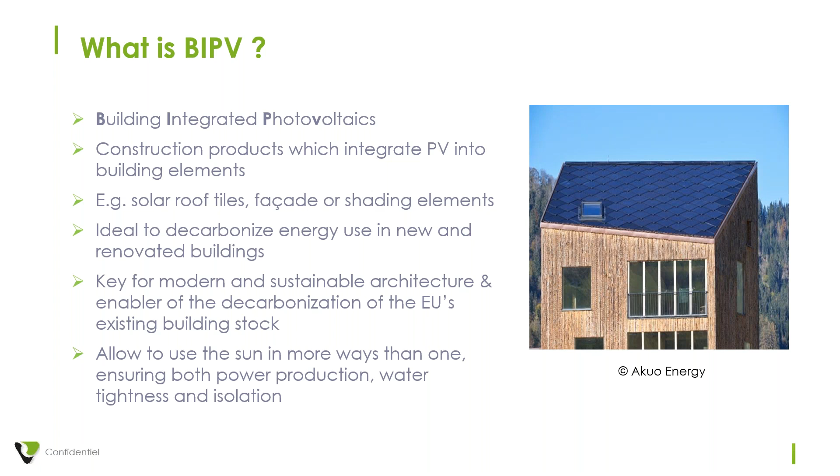More and more we see that architects are keen on getting this kind of elements into their new construction, but it's also very useful for renovation. What is interesting is that it has several added values. So it brings power production, but it also brings water tightness and insulation. So I'll get to my next slide, or you get to my next slide, please. These are a few pictures of what has been done over the world by different stakeholders, so that you can see on the facade, but also on the roof. Next slide, please.

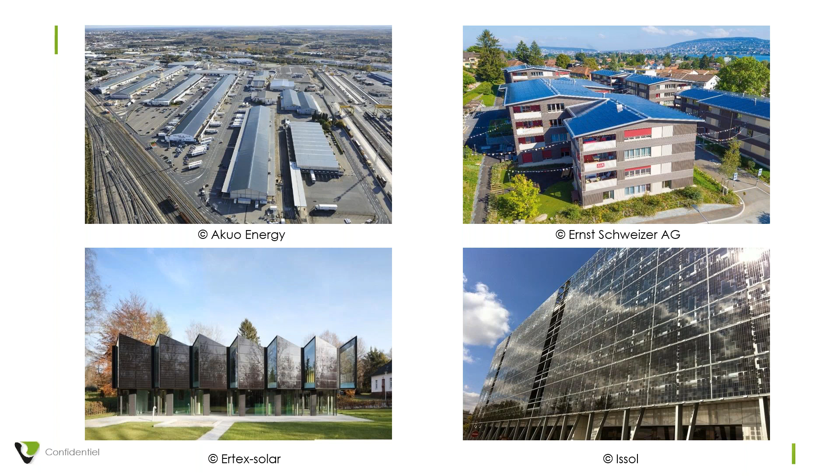I would like now to go through with you the manifesto that we released in March 2020. And this was strongly diffused in the EU areas, so namely the European Commission, the European Parliament, but also sectoral associations such as ours. And so this manifesto is a two-pager, and possibly Miguel could share the link with you in the chat box. So the objective was to raise the attention of the policymakers regarding 5 actions that should be undertaken at EU level.

First, we wanted to stress the need to have a market pull, and therefore every legislative text or legislative initiative should foster the use of BIPV, be it in the climate law or in the construction product regulation, or even in the renovation wave that is coming. So it's important to have really this pull.

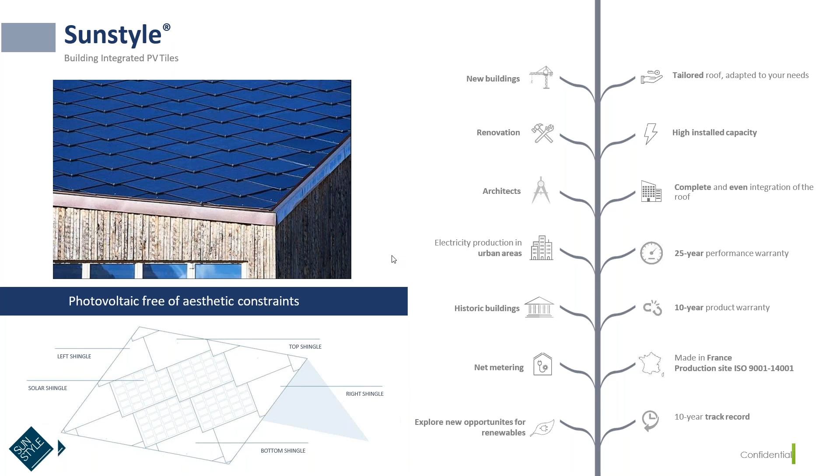But then we have been working a lot on the product so as to increase its resistance, its resilience also, and then to work on different colors. Next slide, please. So here you can see the 3 colors that are easily doable. If you are in Florence, for instance, you can go for terracotta. If you are in Paris, you can go to gray. But then if you want pink or blue one, it's also feasible. But the mass production is available in these 3 colors. Next slide, please.

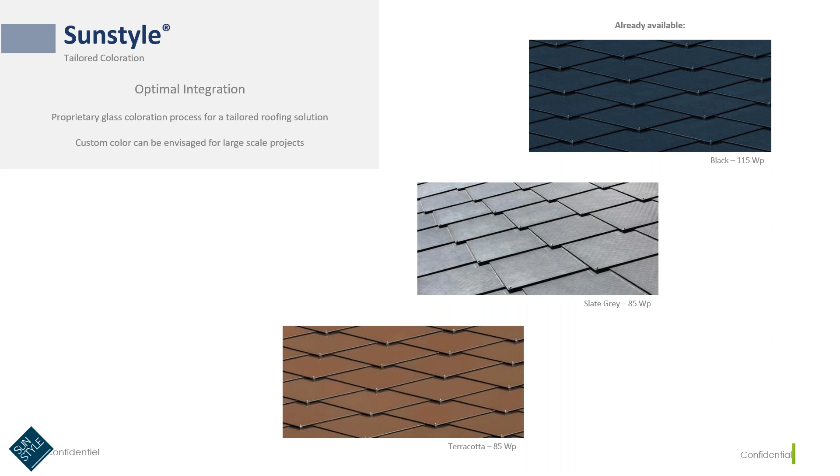Our market target is self-consumption, and per this slide, I wanted to give you an example of where it becomes profitable. So if you take a rooftop of 55 square meters and you install a Sunstyle product of 9 kilowatt peak, then it takes you 7 years to come to the point whereby you start earning money. So it's not so long actually, even for individuals and especially for large industry or companies that would use such a product. Next slide, please.

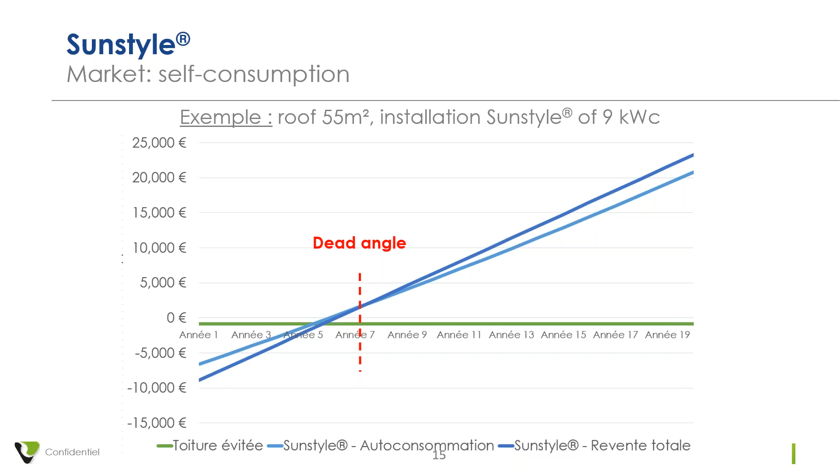These are the characteristics of the product. So this slide is addressed to the ones that really know BIPV. So the total weight is around 20 kilos. We have 10 years mechanical warranty and 25 years performance warranty up to 80%. I give you the figures about hail resistance, wind resistance, fire resistance. This is for the people who really like it and want to know more. It is 87 centimeters by 87 centimeters. So it's easily installable because it's square. Next slide, please.

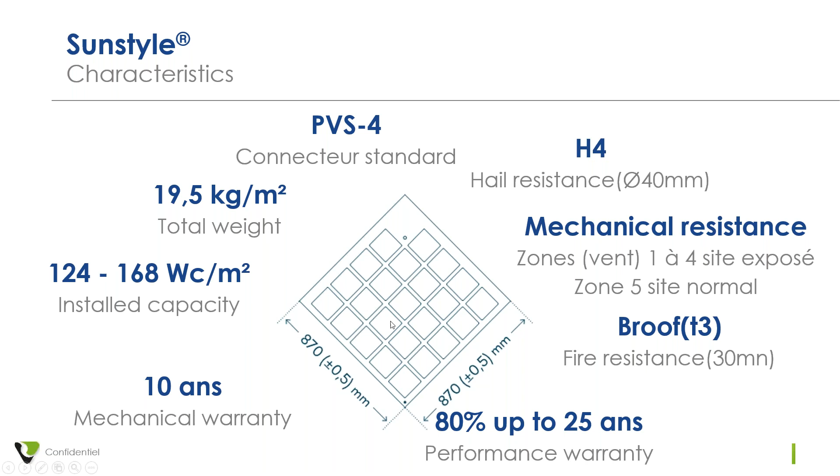As I told you, we started 10 years ago, but since then we have improved our product and we have been through many certification processes. So I know that some certification bodies are in the webinar now, so I'm speaking to your hearts. So we've been through the French certification of the system by the CTMNC, and then you can see the number, but pictures to illustrate what it is. Next slide, please.

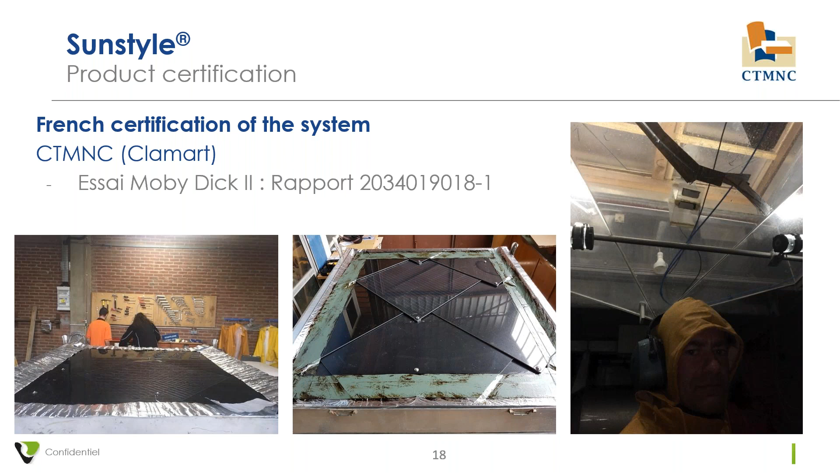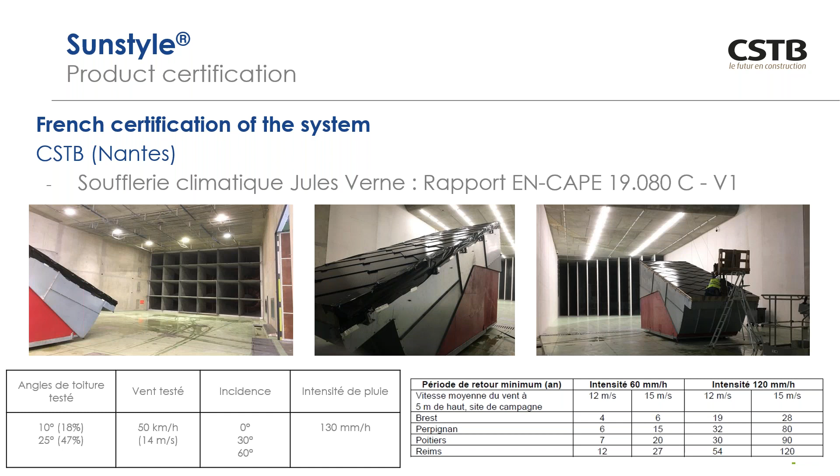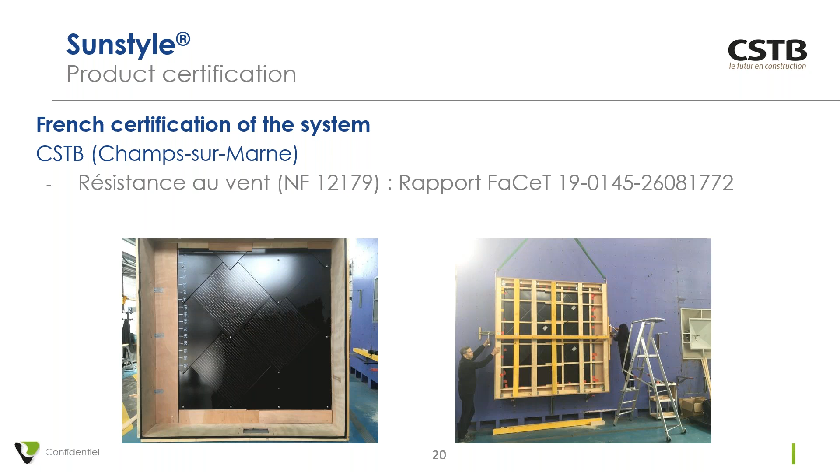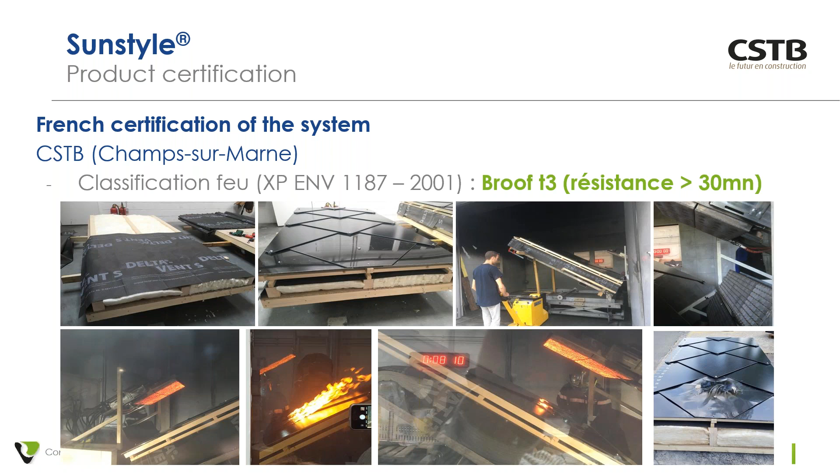This was the another CSTB certificate to the fire. So basically, they've been burning our tiles. Very interesting process. So here you can see our tiles burning, or not burning.

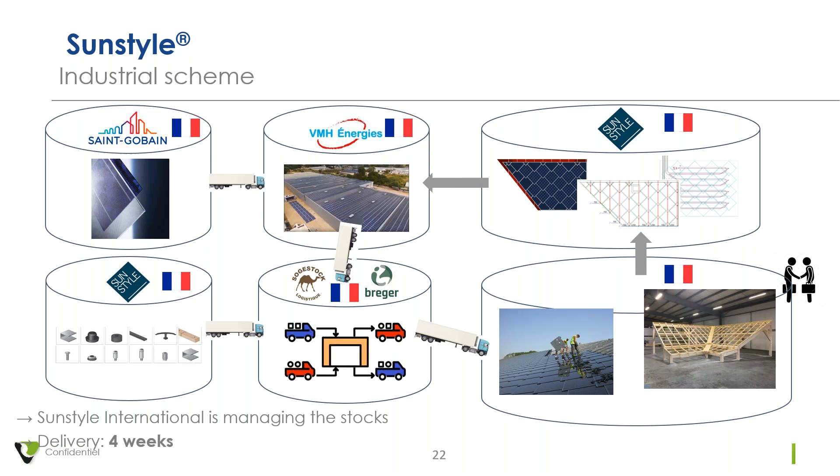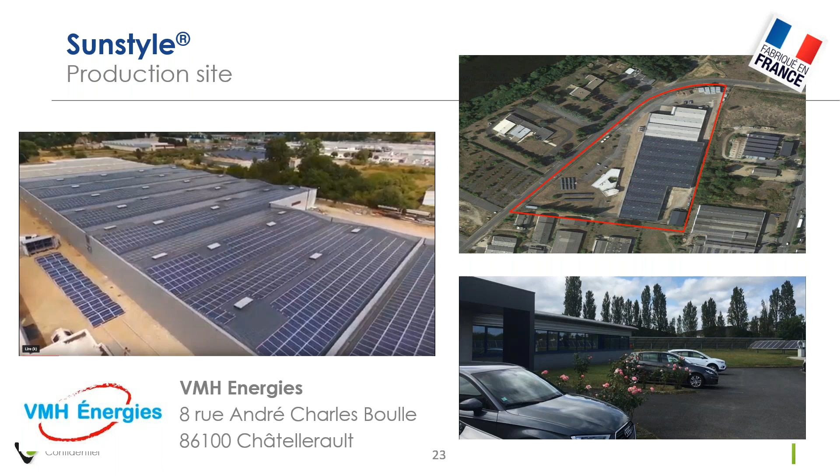This is a picture of the factory in Châtellerault. So you can see it's a very big production site. Currently, our capacity is 50 megawatts, and we are looking forward to extend this considerably over the next years.

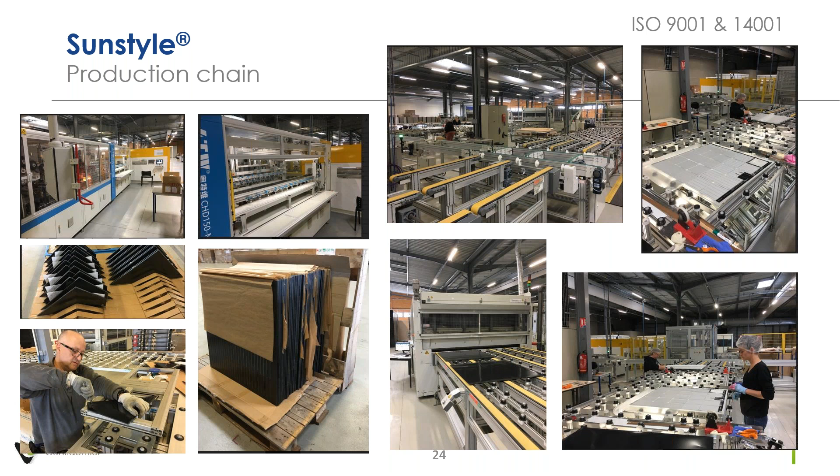Here you can see what the production chain looked like. This picture was taken before the COVID crisis, therefore they don't have masks, but the new ones will be with masks, of course.

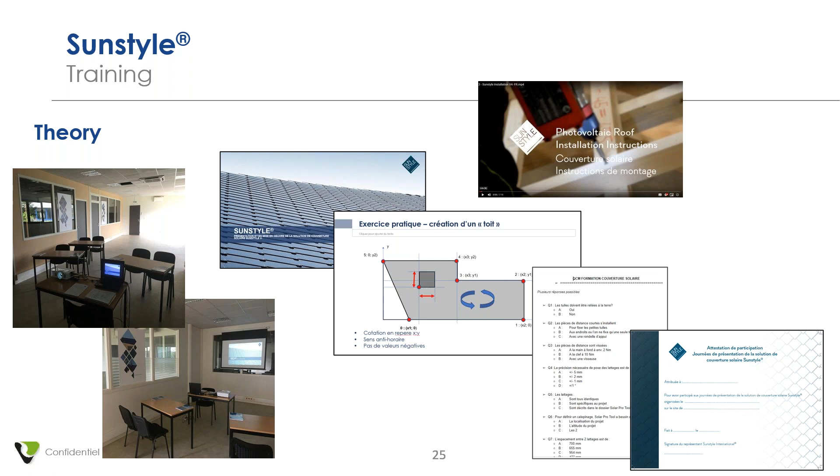And then we decided to invest to create a training that is composed of 2 parts, a theoretical part and also a practical part. It takes 2 days. It's a 2-day training, and we have groups of 8 to 10 people, and we organize them once a month. We started by targeting French installers, so it's currently in French, but then we will move on to EU-wide installers, so we will move to English as of 2021.

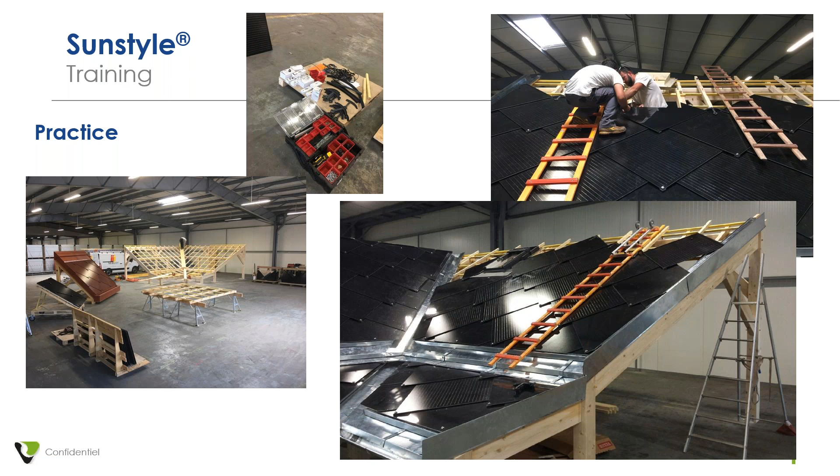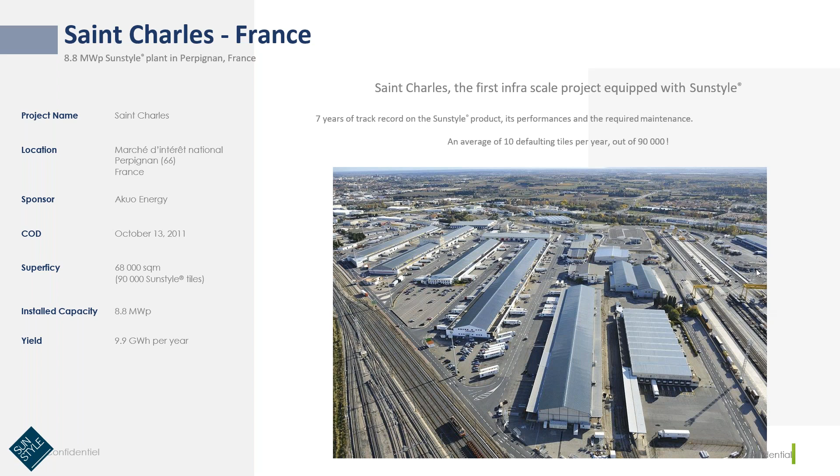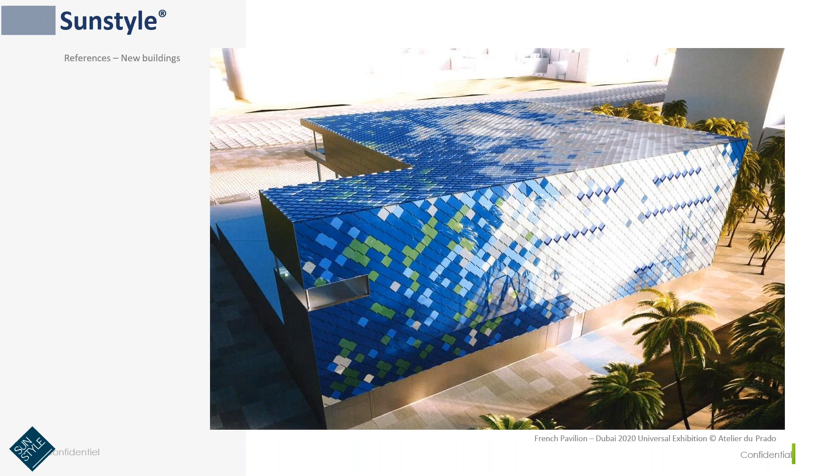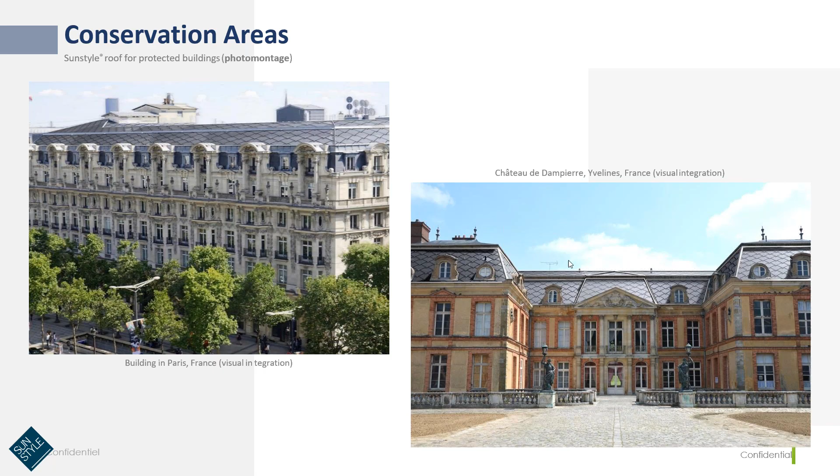Okay, thank you so much. Good morning, everybody. I would like to go quickly through our thinking on how to scale up these BIPV products. So can somebody start the presentation, or can I do it myself? Okay, next slide, please.

So we belong to the TNO research organization in the Netherlands. We have activities on buildings. We have also activities on circularity, and we have also activities on sustainable energy sources like PV. We have 2 groups. One is in the north of the country, located in Petten. And then we have a new one, it's like 10 years there, in the Eindhoven region. And that's more a collaboration between TNO and other institutes as well as universities.

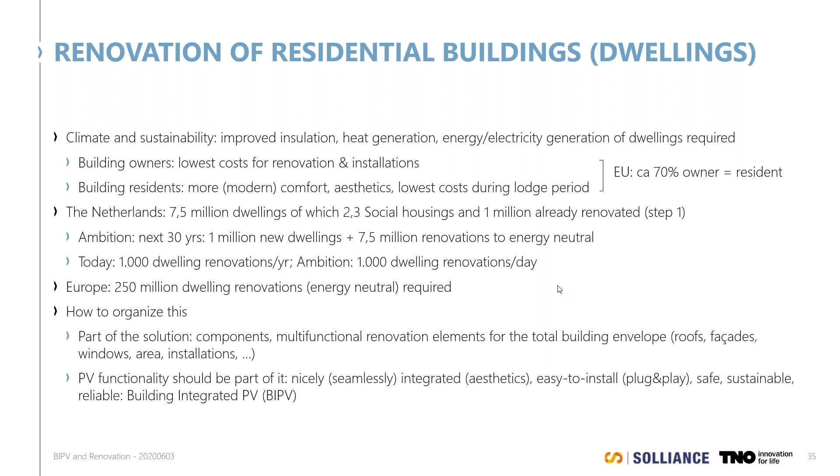Now I'll give a few examples of what happened in the Netherlands over the last 10 years in relation to renovation. Already 8 years ago, 152 houses were renovated from energy class F to A+. It was a complete renovation with a new building envelope, including BIPV in this case.

The inhabitants had to leave their house for 1 week, but only 1 week. In the end, they were all very happy with the result, but the expenses at that time were quite high. This was related to the higher cost of PV at that time, but also to the approach of this project, since it was a one-time project, and a lot needs to be optimized, including around the building organization.

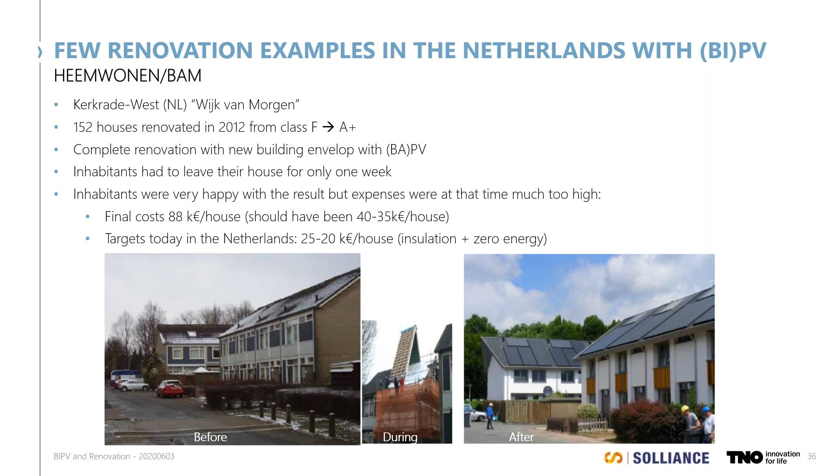So you see some price targets. For renovation, the targets in the Netherlands today are like 25,000 euros per dwelling to go to zero energy.

Here's another example: the Panzer concept. They can do it in 2 days and the inhabitants can just stay there, which is an improvement compared to the previous example. In this case, not only was the roof changed, but also the facades, and the indoor setting was also updated into a more 21st century setting.

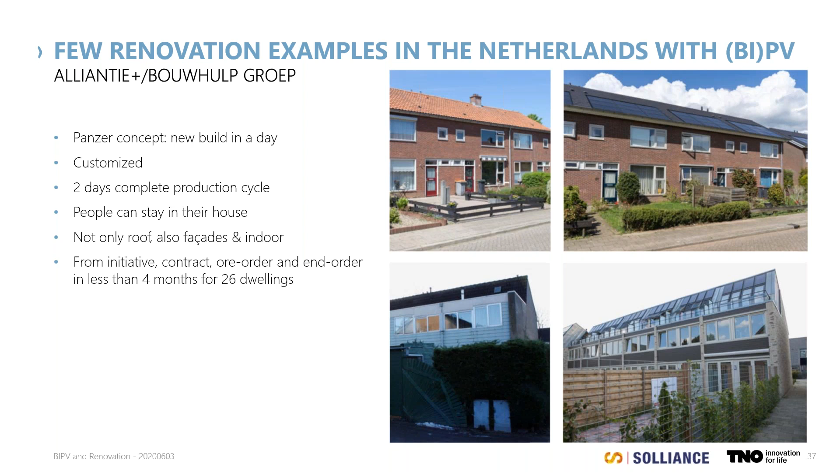Still another example, from the company Rebor BV. They have a patented approach to a fully integrated solar panel roof, and you can see two nice results of how it could look like. It's a full roof that is replaced immediately.

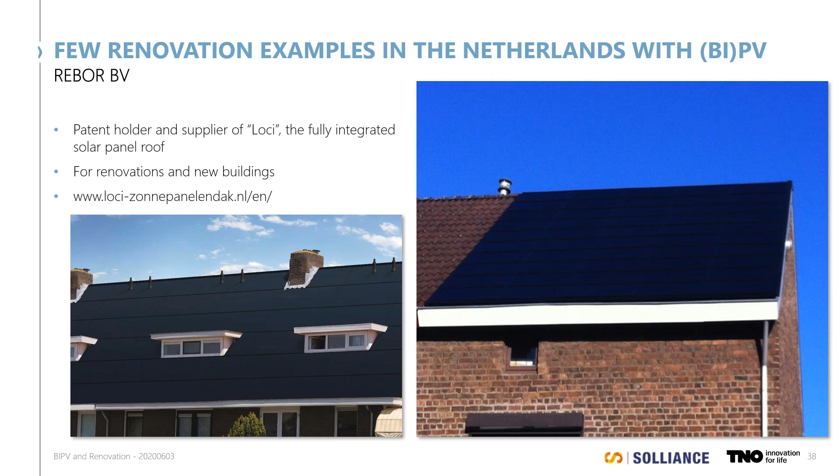Another example, done by Airspire, another company. They had a complete roof installed on 14 homes, also in a residential area in the Netherlands. It's about 70 meters of PV, and as you can see in the picture, it really looks nice. It's not really BAPV, it's really Building Integrated PV.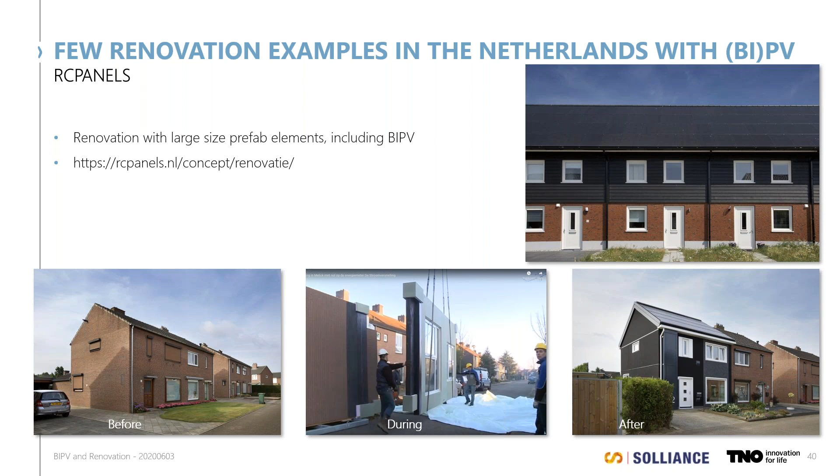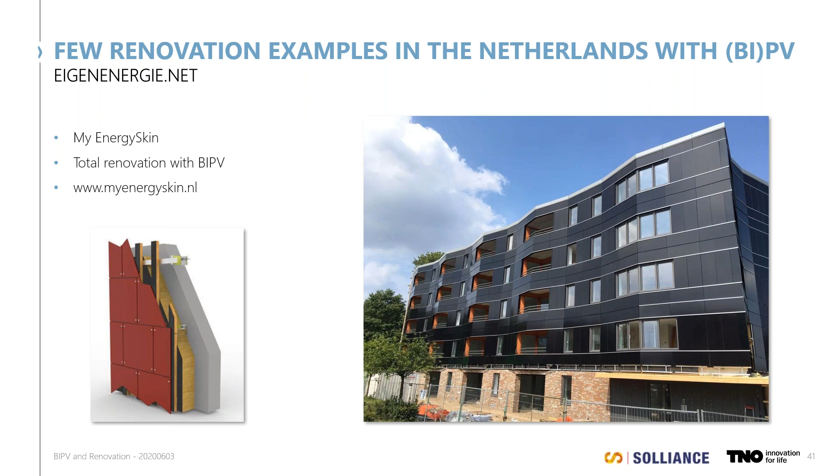Now, this is another example. This is in a social apartment that was renovated with an energy skin, as they call it, from eigenenergie.net. What you see here is that basically the complete facade has been equipped with solar panels. You've seen also the color that Sunstyle just showed, this is also an option here to make it look different than this black layout.

This is the last example. It's a high-rise building for the Netherlands, at least it's high-rise here. There are like 150 apartments. What you see is that the facade is equipped with PV panels, but in another integration way: the facade is a little bit tilted, so if you look upwards, you will not see the PV elements anymore. You have just very nice facades, and the PV elements are embedded in the element, like you see on the left.

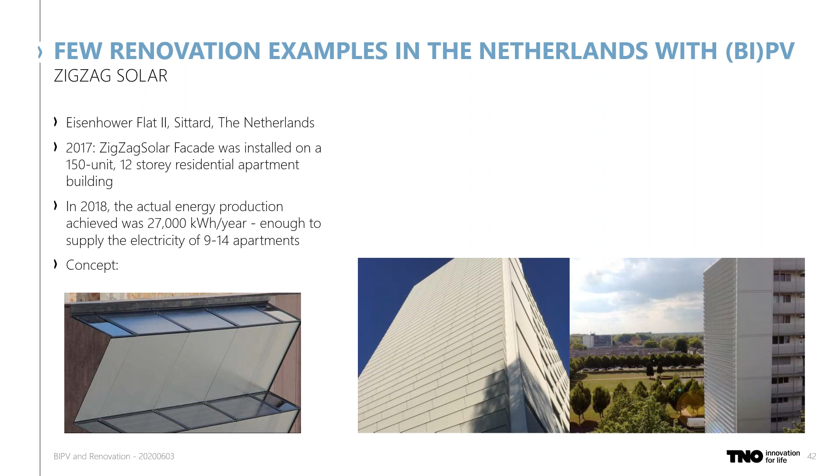So I think what we see is that in the last 25 years, a lot of BIPV projects took place, mostly based on PV technology push. Already Alessandra said, okay, we have to have this market pull here. Now what we observe is that the large construction element producers are asking for solutions: how can we bring PV in or on our construction elements? This is a very big change, a kind of market pull, but I would say the real market pull should come from the owners of the buildings. That's really the next step.

They should be aware that it's better to have fully integrated PV as well. I think part of this market pull from the owner side could be organized by these zero energy building incentives that are now organized on the European level. The Green Deal is part of this. And then, of course, many people start to realize the climate is also changing very fast, so this should help also to organize this market pull, together with having nice products.

And that's the next one: we need really aesthetics, safety, ease of installment. This is also very important. Now we are looking with several building element manufacturers, how can we integrate a PV element on top of certain construction elements? And to our surprise, in several cases, we could use existing production technologies for this building element in order to bring these two components together. So this is basically the good news.

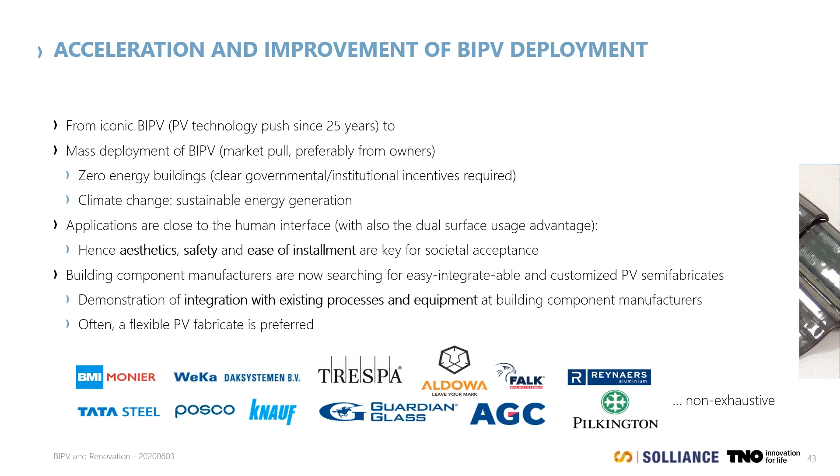Now, what should we bring together? What we have today are fabs around the world that make PV elements, as I would call it, like for instance crystalline silicon cells, flexible PV cells, or mini modules. This is available. But what we have then, typically, is a kind of standard module manufacturing, and this is something we can basically not use for BIPV.

So we need to start from this basic PV material, which can be supplied from around the world. Then we need to find a way to produce what we call a PV semi-fabricate, which is basically a semi-finished PV module that has been customized, so a certain size or shape or with a certain protection inside. And then we have to bring that PV semi-fabricate to a certain building element, preferably by using production machines and processes that are already available on these building component producer sites.

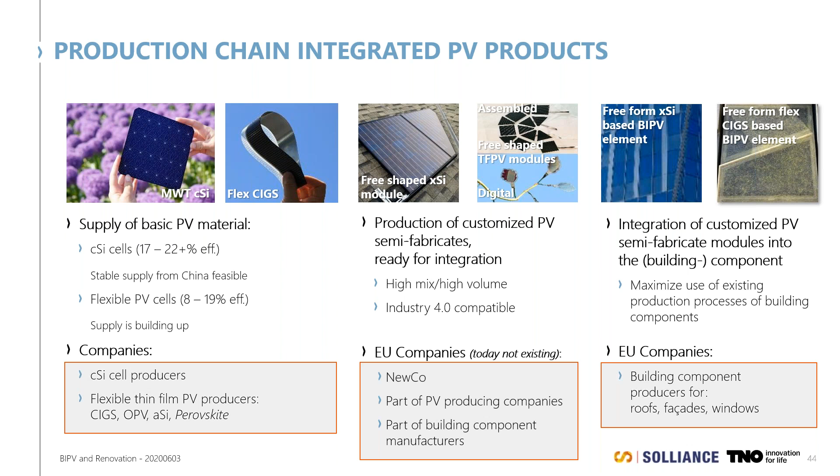So what would be required from the PV supply? We need a kind of uniform product, of course, high volume with high yields. Then for the PV semi-fabricate manufacturers, this could be a new company, or it could become part of a building component producer, or even part of a PV producer itself. So it's not so important where it would be located. It should be able to produce bespoke products, and it should be able to really produce in series. This is what we call mass customization.

Now then we have to go to these building product producers. Also they would go preferably into series production, multiple variants, process quality oriented, of course, and then it should end up at the final end user place. So what is our role as a research organization is to develop integration-friendly PV technologies, concepts for integratable PV semi-fabricates, and then, of course, process technology for product integration.

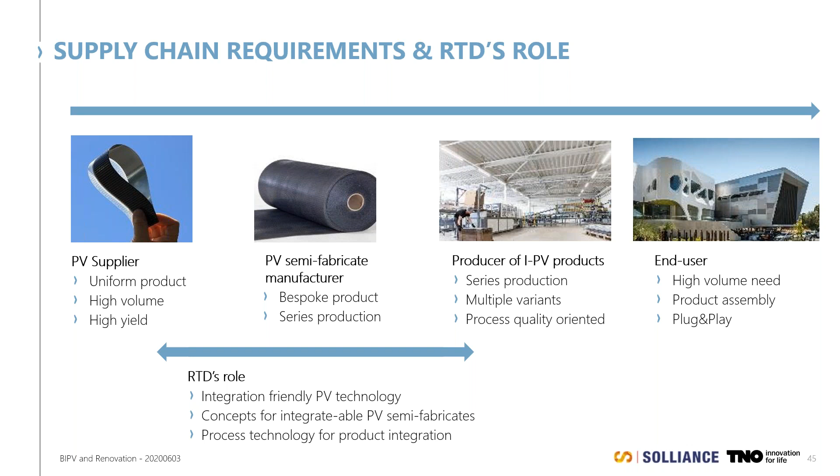Very short, from the PV side, we see like three generations. Today, many PV elements have two contacts, one at the bottom side and one on the top side. We can work with that. It can be crystalline silicon based, or it can be thin film PV based. It doesn't matter so much.

The next generation, in order to allow mass customization, we would like to have bottom contact PV elements. Only on one side there should be a contact, and that allows us to really pick and place very fast these basic PV elements into a certain shape or format you would like to have.

Generation 3 is also bottom contact, but with customized PV elements. For instance, you see an example for crystalline silicon cells. You can also start to saw this, and then you have all kinds of shapes and forms possible. We can do similar things for thin film PV. I will show you in a minute.

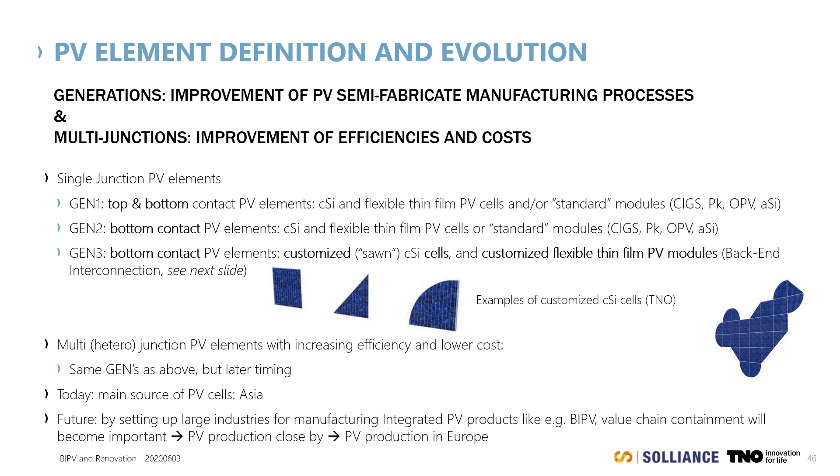The next generations will really be the high efficient variants, where we try to reach 30% plus by, for instance, combining a new technology called perovskite PV with silicon solar cells, where we can really boost this efficiency. If you go to facades, it will become very important to also have better performance there.

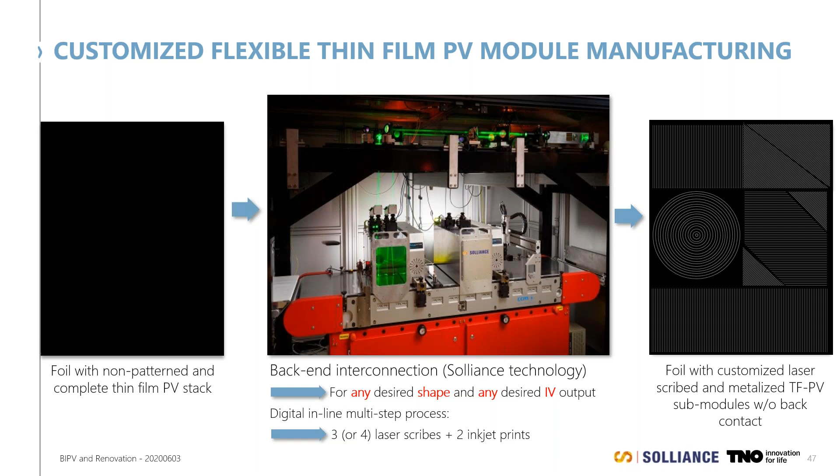Then it enters this machine where we make the PV semi-fabricates. So we have a kind of backsheet and encapsulant. On top of that, maybe a kind of conductive traces. On that, we mount these PV elements. Then we protect it, and this protection depends really on the end application.

If we glue it between glass, we only require minimum protection. If we glue it on top of a facade element, we need maximum protection. So the customizing is really about form and shape, but also the packaging, and that's crucial to reach mass production of these customized products. This product itself will not be IEC compliant because it can only be tested in the fully integrated situation.

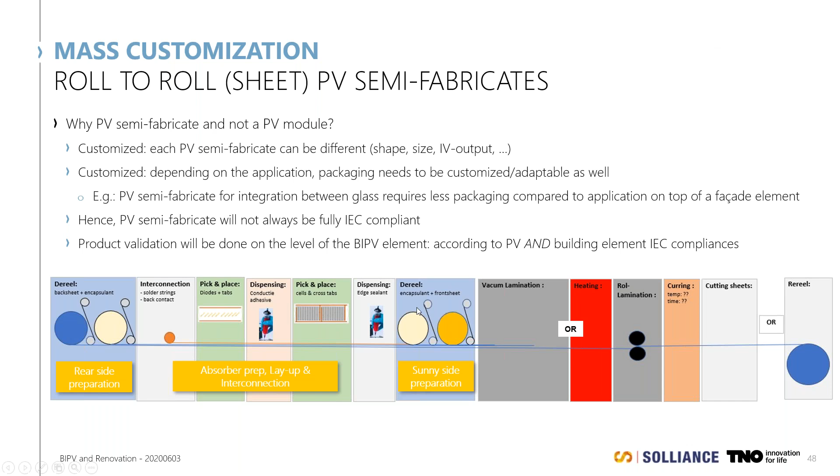Next slide, please. Unfortunately, I could not show the movie here. What we did is we had flexible CIGS, which we brought together with a roof tile element in a machine that was already available at the production site. So we did not need a new process or a new machine to bring both together, only maybe a slightly adapted gluing element. Based on the semi-fabricate, we could immediately bring it together with this building element, and this is what we call mass customization.

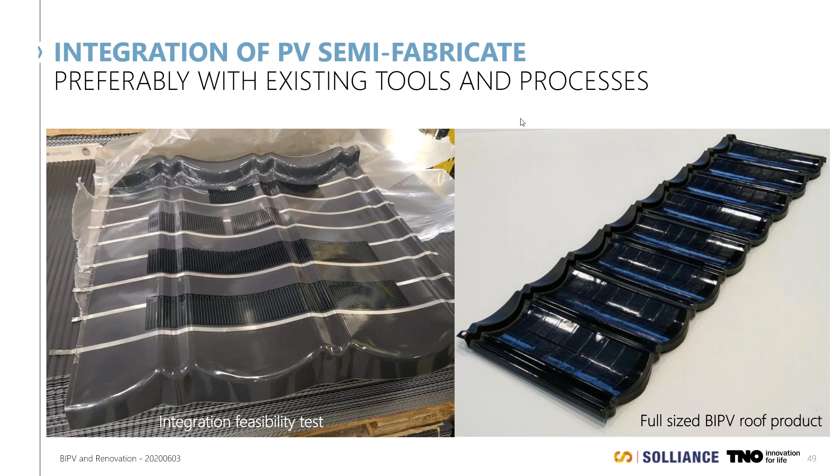Next slide, please. Now, what most of us believe is that we should really start with roofs, because there you have the highest electricity harvest potential. Aesthetics sometimes could be less important, but if you look at more historical buildings, for instance also in Italy, it's also important to keep the aesthetics high.

Facades, I think we need further technology development. It's there already, but due to the fact that the orientation is not optimal, it's also very useful to look at even higher efficient PV technologies. Facades are quite visible, so aesthetics is more important than for roofs, I would say. There are several ways to address that, and I think we can definitely work on this topic in Europe as well.

And then, of course, the third one is windows. It would be great if you could also provide semi-transparent or translucent PV elements in windows, and this is also a work in progress. For instance, for skyscrapers, it would be ideal because a lot of glass is used, and it would be a perfect solution to have BIPV there. Next slide, please.

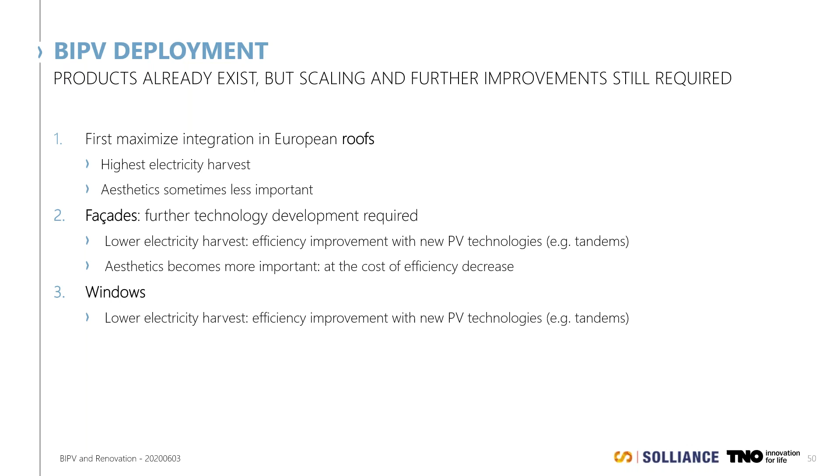So what you see here are some examples of what we did. On the left side, we provided roof tiles with flexible PV with the company Monier, a roof tile producer. Then together with Hoesch and AGC, we developed integrated building elements with OPV that came from Heliatek.

Next, you see facade elements with a very particular shape, and inside we have also embedded these free-shaped flexible PV elements, integrated using the manufacturing process of the facade elements. On the right side, you see an example of a PV window element. This is a very early prototype, but if we could realize this kind of PV technology, it would be great for windows as well.

And of course, if you see on the lower right, we need to improve these visuals. I think Sunstyle already gave nice examples. We also have a spin-off at TNO, it's called Solar Visuals. So you can mimic a brick wall if you'd like to do that with solar panels, or you can go really to high-fancy facade elements, on the right side down.

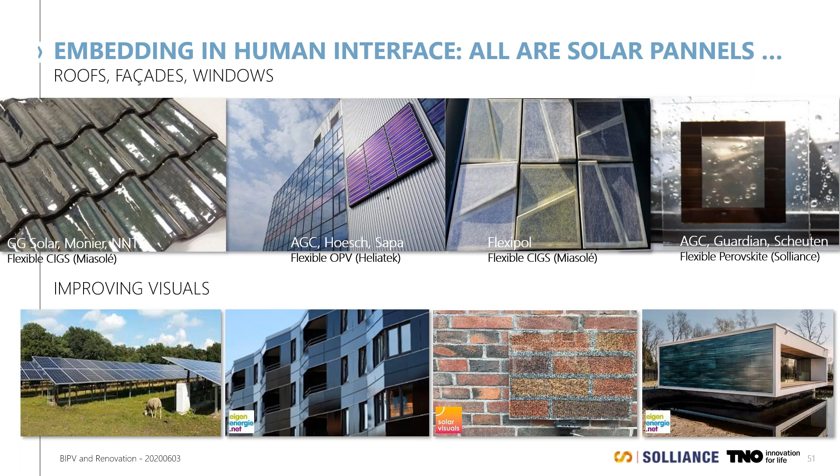Okay, next slide please. I'm almost finished.

Now, how to accelerate the renovation? I think we need to think in repeats. So I'm teaming up with the Bouwhulp group. They developed some concepts to accelerate the renovation. So instead of renovating 100 dwellings, we should go to maybe 1,000 dwellings, and bring it all together in a big package. For that, we need to have the supply of these building elements as well.

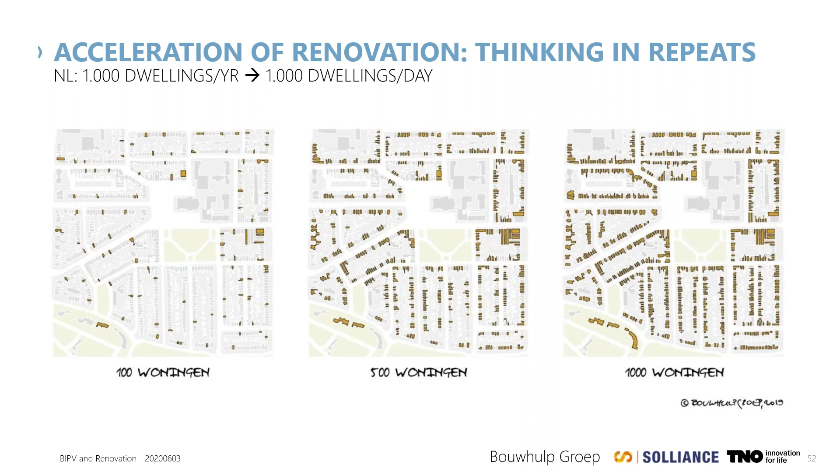Now, the renovation itself, we should also consider in steps, as I already indicated. I think roofs are perfect to start with, not only insulation but also PV. Then gradually we could move to the facades, and we can also go to better heating installations and things like that. So it will be a stepwise approach in order to come to this A++ and then maybe a little bit higher energy norm.

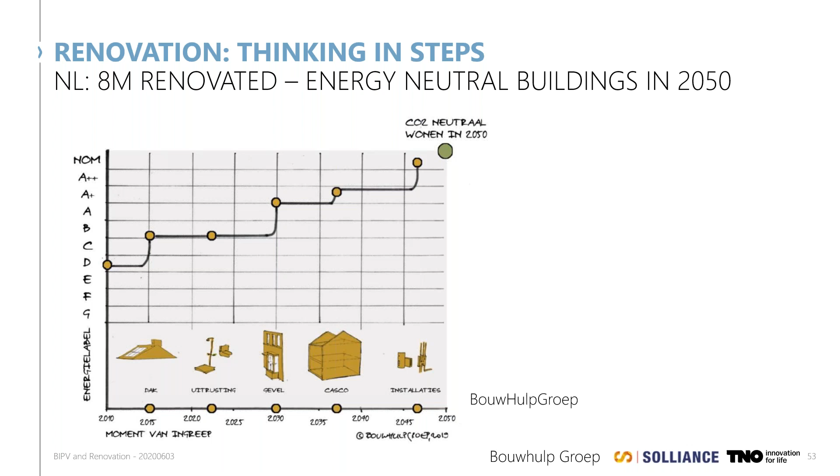Next slide please. Now, thinking in components is also very important. So in the Netherlands, this Bouwhulp group collected all types of roofings available in the Netherlands, and they could make like 9 categories of this. This also will help to scale up. Otherwise, each roof could look completely different, and then you'd have to restart all over again. But if you bundle these groups into really components, that can also help accelerate this renovation. And of course, part of this game is also bringing PV together with all this.

For facades, it's the same. They basically discovered 7 different facade elements, and the same also for the spaces inside. It's also not unlimited, it's a kind of 5 standard inside elements. Next slide.